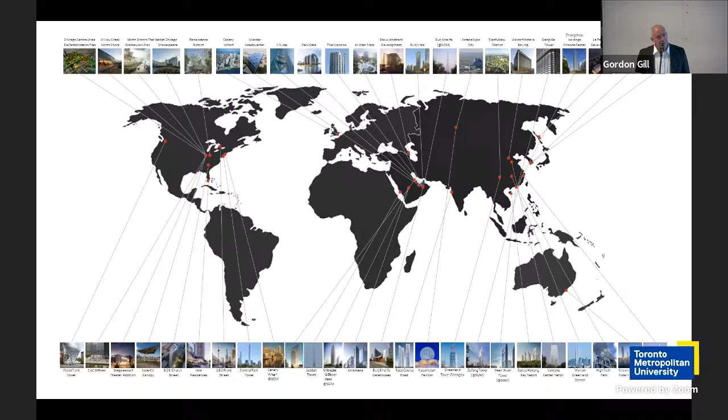We are lucky to work around the world. We do master planning. We have delivered 4 cities over the last 17 years, 2 of which are Expo cities, and we can chat about that at some point. The other 2 are expansions of cities in China, Xi'an and Tianfu.

We're probably best known for these guys. We probably have 6 of the 20 world's tallest under our belt in the firm. Adrian designed Burj Khalifa, which you probably know, when he was at Skidmore. We were just in Dubai, Cairo, and Riyadh the last couple of weeks. Kingdom, or Jeddah Tower as it's now called, is hopefully back on track, so we'll see what happens with that. Central Park Tower, the image on the far right, finished about a year or 18 months ago, is now the world's tallest residential building in Manhattan, with Extell.

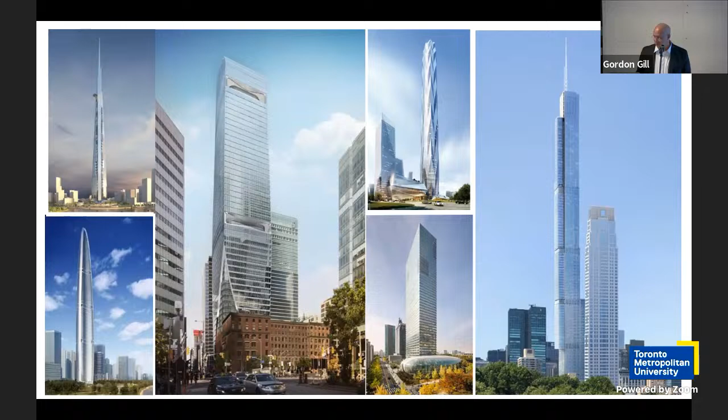And we have a host of buildings. I snuck 160 Front Street in there, as you can tell — not super tall necessarily, but certainly near and dear to our hearts. What people don't know about us is that we do a whole scale of projects, from parks to pavilions to theaters, and we enjoy that process.

In the office, we rotate staff off of projects. Once they live through a project, they go to another, but it's usually very different. What we don't do is have a team that does super tall, or a team that does theaters, or a team that does parks — so you get to work on everything we have. And we like that, it's just richer.

We find that we can transfer technology, we find that we can transfer processes. We work with artists, scientists, psychologists. Our head of sustainability is an ecologist, Dr. Chris Drew. And because of that, we do a lot of research.

A lot of these people in this room who are now at school here at TMU will hopefully see some of this, either throw it out or pick it up and run with it and figure it out and really go do something else with it. So we don't go around telling people that this is an answer. We simply say, this is our process. We'll start here.

So when we started the firm, there were 5 of us. We had some cardboard boxes. We were in a little back room in Chicago, and we were all excited when the printer came, because that big box gave us the conference room table.

That was 2006, October. In 2007, we had enough work for 1,000 architects because we had won a ton of projects and we didn't know what to do. We actually employed other firms to help us do the work. One project was 10 million square feet. So we were lucky.

In 2008, everything stopped. The economy crashed. All the projects went on hold. Dead silence. Fortunately, we were well protected financially, and so we had a bunch of people in the office and we didn't know what to do. We didn't like the idea of ballooning up so fast.

So we took that as a little bit of a moment to correct ourselves. And we went from internally 250 people to about 100 people, and we've stayed there ever since. We've never gone back to that size. And so we have a process in the office and how we work to maintain our size, because we like that connection to the people and the work. We like to get dirty, as we say, and we don't want to grow any bigger.

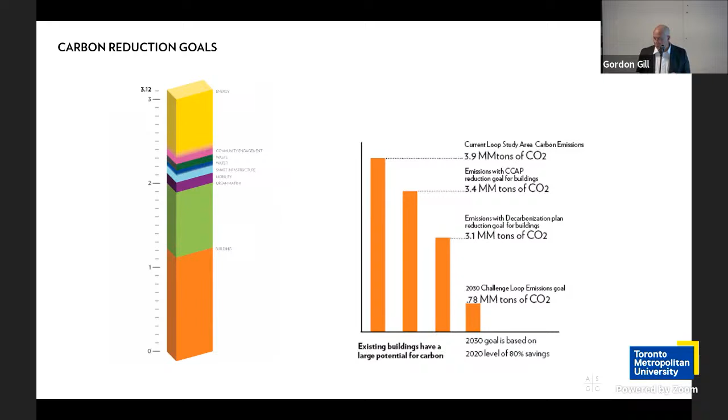And we have a 280-page document book that we published at the time. The first thing we did was try to get a hold of a physical dimension of space that we could look at, which for us was the loop in Chicago, which represented about 10% of the density of Chicago. So we took 3.9 million metric tons instead of 39 million metric tons and tried to figure out how we could remove that from the city.

We quickly took the systems-based approach, and everything you see tonight is based on this idea of systems. So what we do is we unpack an idea around a city or a building or a typology, and then repack it to try and get mutually supporting or mutually conducive efficiencies. So what does the transit and mobility have to do with water? What does water have to do with the buildings? What does all of this have to do with community engagement? And just one thing to remember, as you all know, it's all about people.

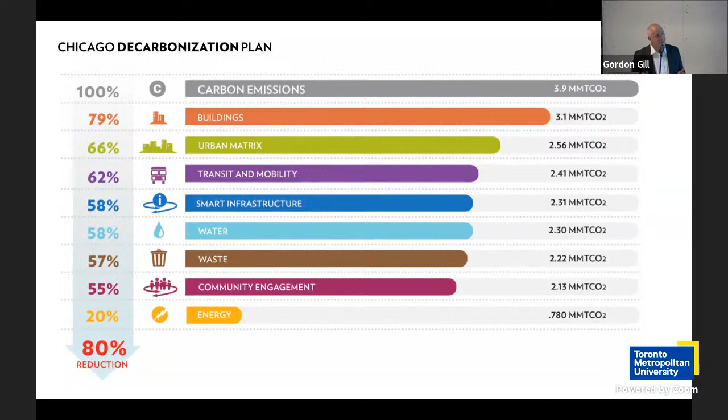We can talk all we want about architecture. At the end of the day, it's all about people. So even though technologically we can do the math and spend $27 billion on solar photovoltaic fields or wind fields and take the city off the grid, it does absolutely nothing for the improvement of the city itself or those who inhabit it.

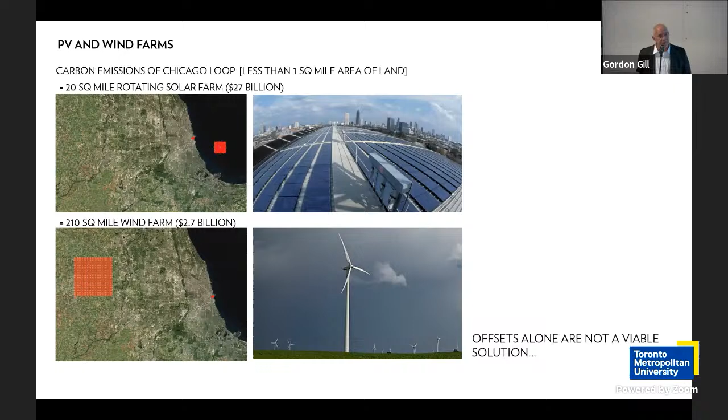We defined the core as this red loop here, which is our river, for those of you who know Chicago, and Grant Park. And at the time, our core was only 10% residential. What we learned very quickly as we ran scenarios was that residential uses about 25% of the energy of office. So obviously, the more mixed use environment you have, the better.

But it just keeps going, right? So it's not just the energy component of it. The life of the city improves. The mailman is more efficient. The delivery logistics becomes more efficient. The infrastructure becomes more efficient. And so we began to think about how we could introduce residential into the core of Chicago.

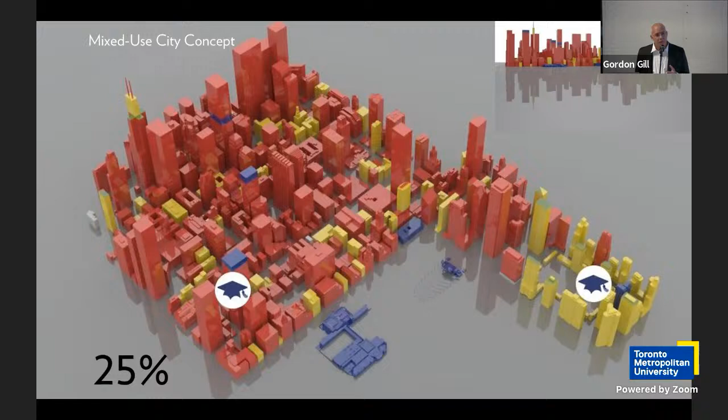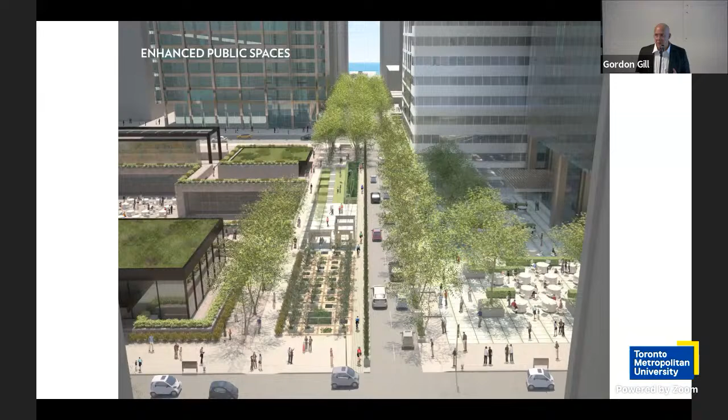And some of this was actually done. We retrofitted 24 buildings at the time, and the city went on to do some of these retrofits and adaptive reuse projects over time. We have streets that had tunnels under them for coal delivery, so we utilized those for moving air and goods.

This project, which was Sears Tower, now Willis Tower, came to us through a client who wanted us to build a new hotel next door for a net zero energy hotel on the same site. We gracefully declined and said, we don't think we can do that because it just doesn't pencil out. However, what are you doing with the big guy? What are you doing with Willis?

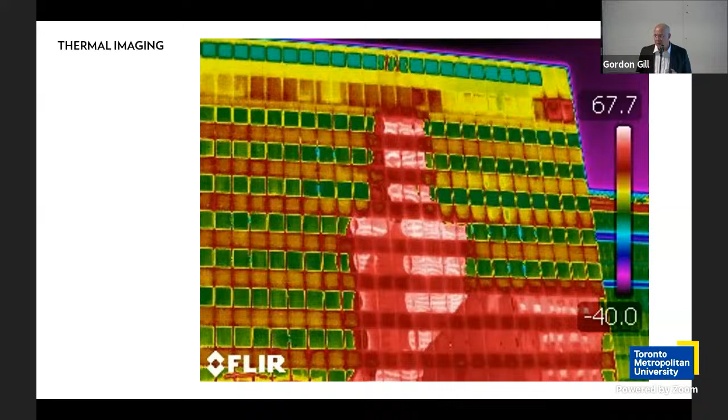To their credit, they'd been doing a lot with Willis. They'd been doing lighting, looking at the facades, but Sears Tower, Willis, was from 1974, 4 million square feet, single glazed glass, heated by light at the time. When we did the analysis and we unpacked Willis, we found that we could repack that building and save massive amounts of energy and improve the quality of the environment inside the building.

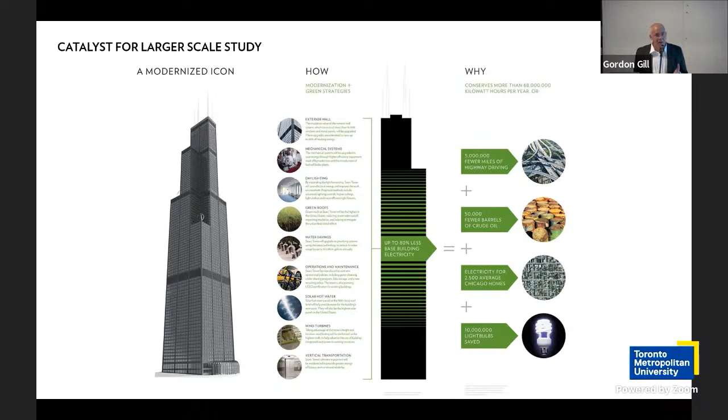That energy from that one building was the equivalent of 4 hotels on that site. So we knew that the math was working from an energy standpoint. We could have easily built 4 hotels. The equation around the economy of it was simple.

When ComEd calls me up and says, hey, I understand you guys are adding a hotel next door, we need to upgrade the substation, we said, time out. Can we talk to you for a second about that? We explained that we could retrofit the big building, bring the new building online without changing the substation. In fact, we might have enough energy saved for you to distribute elsewhere throughout the city. So the question became, how do you feel about adding more customer base to your network without any cost to you whatsoever to your infrastructure?

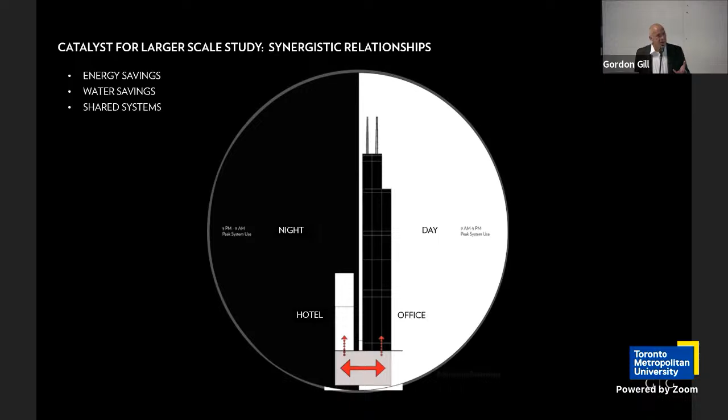They like that because they spend hundreds of millions of dollars a year on infrastructure trying to upgrade density. But the question then became for us, how do you increase density and create this equation and not influence or impact the cost and the quality of life in the city?

So we built this thing. This is a little parametric model that is now 14 years old. It was done for us to understand the interrelationships between these systems. It's complex, too complex for us to understand. We're not mathematicians, but we realized very quickly that this kind of organic or parametric relationship between systems was critical. And the only way we could understand that is to build models that helped us do that.

And today we work with people that are a lot smarter than we are, who have models like this, and help us run scenarios for the projects that we do, whether it's a building or a city or a nation.

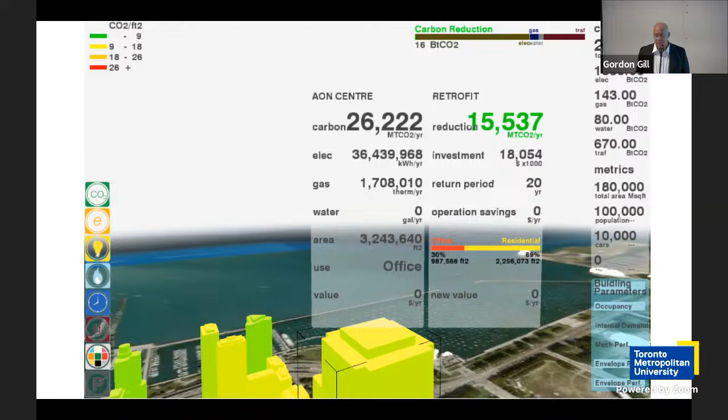We landed here that we believe, obviously, that the existing building stock is absolutely critical to our future, that retrofits are absolutely a must. Retrofit first, build second, if you can. At the same time, we could reposition the existing building stock and create value around that building stock. So it's not necessarily true that the new one is better than the old one. It's just not true. So that gave us an answer that we could actually increase development and reduce carbon at the same time. So all of a sudden, we're going around saying, hey, wait, density isn't really bad.

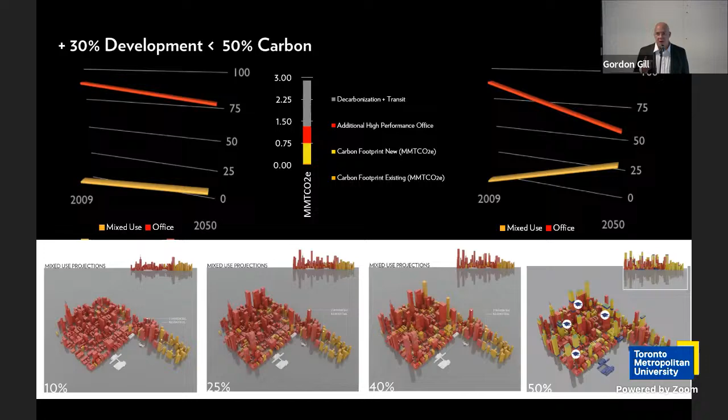Bad density is bad. But if you know what you're doing, you could actually densify and build and still be sustainable, which gave me a little bit of hope that what we were doing just wasn't damaging everything we touched. So the question became, how do we actually pursue this as a practice? Today, the average building efficiency in our practice is 66%. I think the AIA average is 45%. Our goal is to keep pushing that if we can get to 80%.

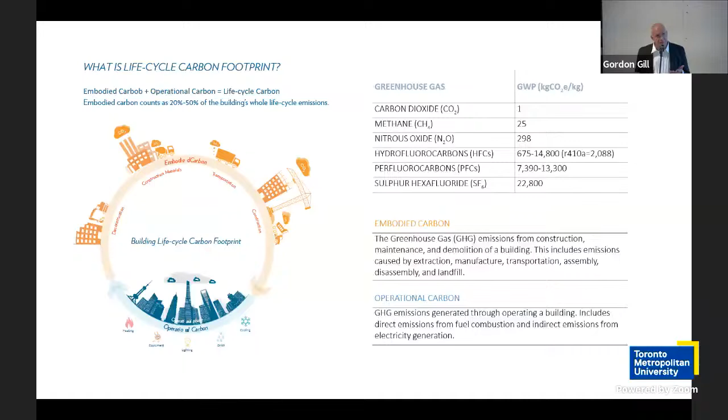Now the question around embodied carbon came up. We've done a lot of work on this, including the density study we did for 5 years, looking at 9 different typologies. The answers might be obvious in terms of where the balance sits. From a megatall to a single family home - 2,000 single family homes on land versus one point tower with 2,000 units - less land, but you have massive amounts of concrete and infrastructure in the megatall. So the answer is somewhere in the middle, around 60 stories or so, in a balanced equation.

However, that's just the building. When you look at the equation around land use, you realize you can densify a structure and put a point tower on a piece of land and save that land for something else, like food. If we go back to using a photovoltaic farm or wind farm covering hundreds of acres, which we still do, but if we didn't do that and instead put it on the buildings and saved the land, that equation around food changes the entire carbon footprint. It's just a completely different story.

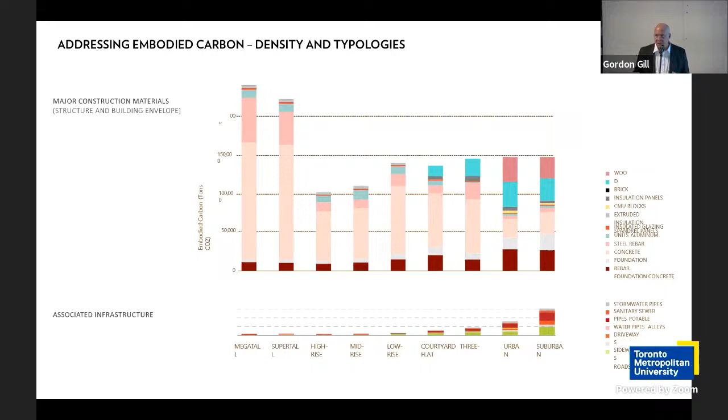We measured the mailman, the backyard fences, the snow plows, the cutting of the grass - everything we could - over 5 years. We worked with engineers to give us data on concrete, wood, and steel, tested these 9 typologies, and published this book. We use this information constantly as we test and dive into things like materials.

Everybody talks about concrete and everybody talks about wood. Everybody loves wood - some of my best friends are wood. Don't get me wrong, but it's not a panacea. Why? Because you're not going to build your infrastructure out of wood. You're not going to build your roads out of wood. You're rarely going to build bridge infrastructure out of wood. You're not going to build your core out of wood.

Even though wood is, as a material, good, it's dangerous to suggest that it's the answer. As I mentioned before, we don't believe in panaceas. We believe in a balanced equation. If we can take something like concrete, the most prevalent material on the planet, and do better with it, we've got a much better chance of solving problems than suggesting that in Dubai, you're going to build your towers out of wood, because they're not.

The problem is that we think about what we can do. Unfortunately, we're the ones exporting our knowledge to everywhere else, but they can't do that. It's just like offsets - we don't promote offsets because not everybody can buy a jungle in Brazil to offset their building. We also think it produces bad behavior, because if you can offset your problem, you're not really solving it. You're just kicking the can down the road.

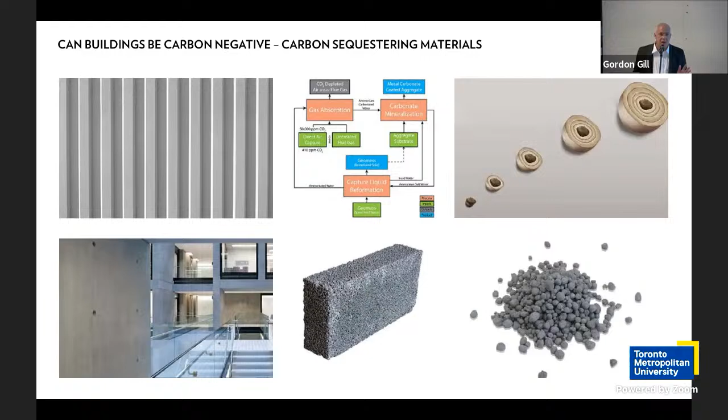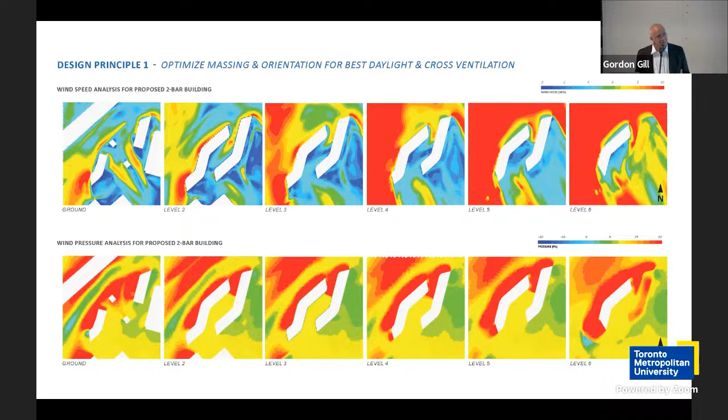We did this study for a tech company in California who thought their path to success was wood. It turned out we can create an equation around design for everything from daylighting to comfort to efficient buildings, and really look at how we can create scenarios that run models to tell you how to lower your carbon footprint. This was a 350,000 square foot office building in California.

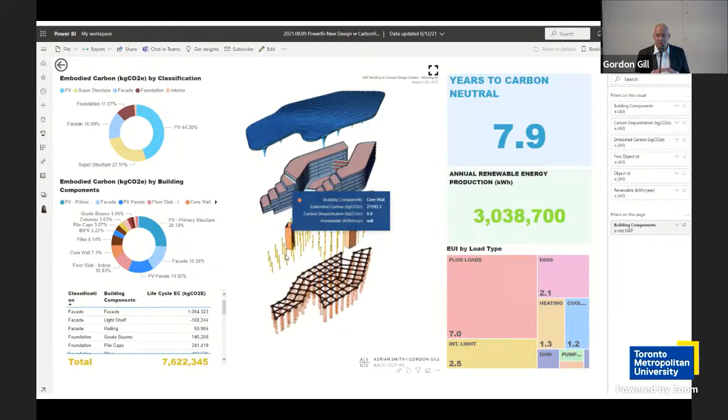We found that we could run the equation to get to a net zero carbon, embodied carbon equation in about 7.9 years. What does that mean? It means we're creating enough renewable energy on site.

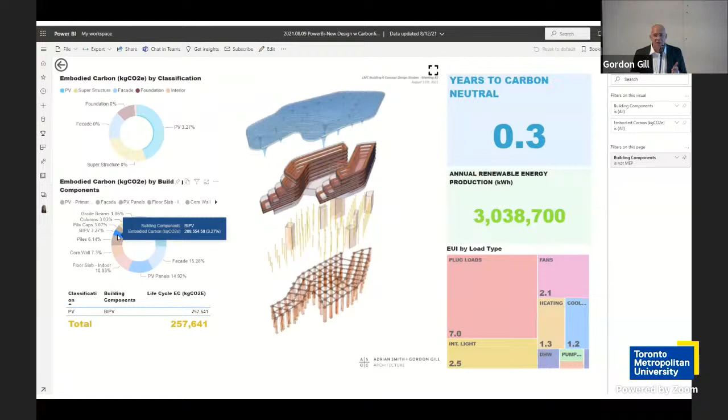That means we have started with a passive design solution to use less energy. Although we talk about technology, we are not technology hounds. We actually are not. We like passive design first, and then bring the technology if you need it. If we can get your building to 50% efficiency, 60% efficiency without any technology whatsoever, just good rock solid design, you win. You want to get the rest of the way? Now we can talk about a technological solution.

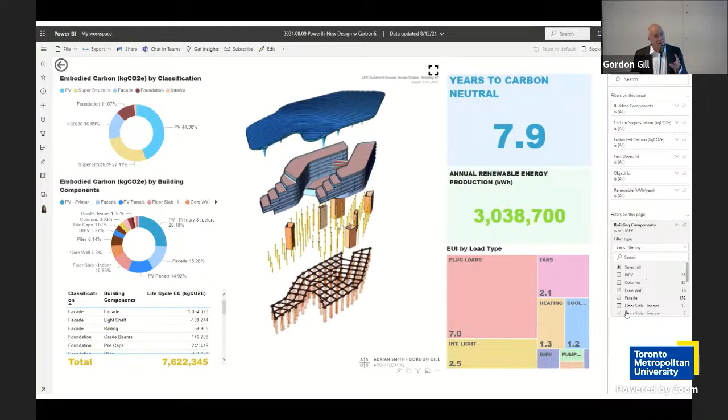At the same time, we're not going to just simply apply that technology to the building we designed for you. We have that conversation with you up front. If you decide that's where you want to go, then we integrate that solution, because applied technology is also, we think, not the way to go.

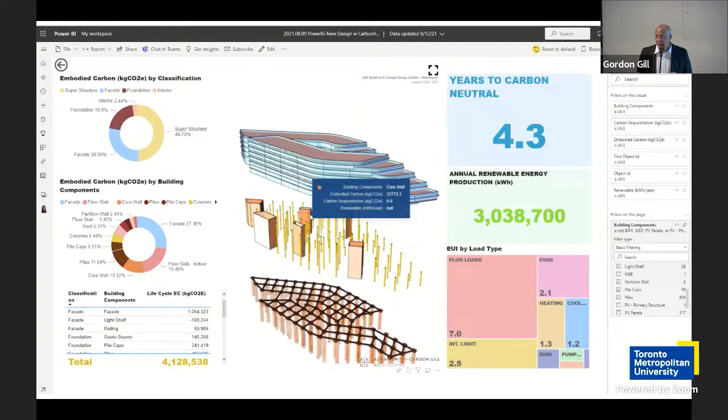When we go to places like Dubai and are asked to look at the Expo in Dubai 2020, we apply the same systems. For Expo 2020, we did the legacy master plan, the sustainable master plan, the architectural guidelines, and we were fortunate enough to win the centerpiece of that project in a competition, called the Al Wasl Plaza. It's a park and a trellis, and I'll tell you about that, with 5 little buildings around it.

So once again, we unpack it and we repack it. But here's the thing: the Expo is thinking about the 6 months or so of the Expo. We reverse engineered it, designed a community, and then reverse engineered it into the Expo for 6 months. So we introduced the idea of where you would live, how you'd walk to work, where the schools might be, and what the density might be because of the pro forma around the future city, not the Expo. The Expo will do what it needs to do, but afterward, what does this place become?

And I was there last week. Now they're in Expo City mode, or Dubai City mode, which is the expansion of the uses and the introduction of residential, education, and business towards it.

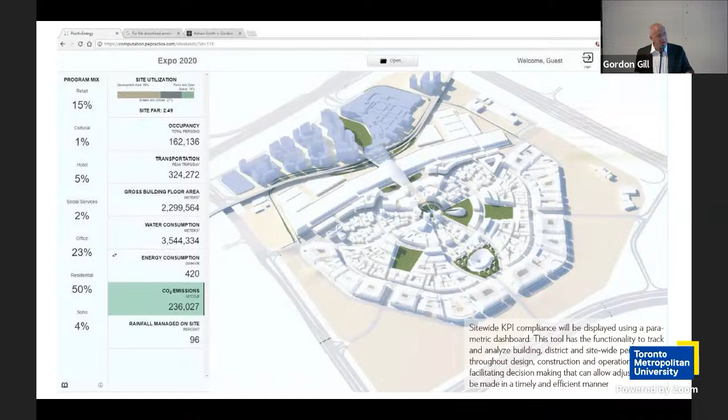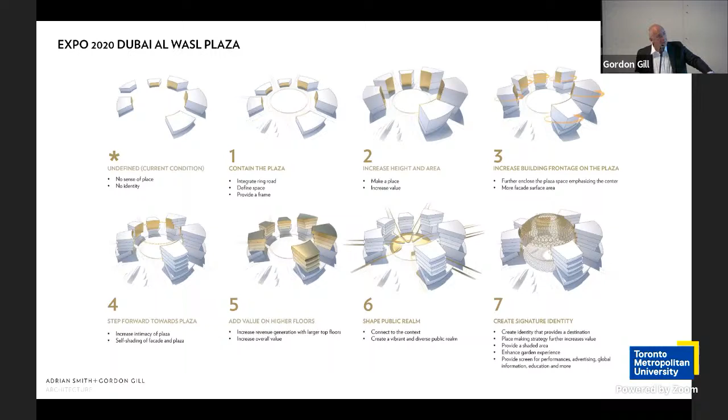First thing we did was we increased the density. And we did that by taking the 2-story buildings around the center space and turning them into 11 stories. We have a flight cone, so we were limited, but 11-story buildings, 3 office, 2 hotel.

The idea behind this is a revenue generation equation about the economy of the project itself. So the first thing we ask the client is, what is your pro forma? And if the client says, don't worry about it, trust us, we know what we're doing, we run like hell. Because the only way that our buildings are going to succeed is if they are economically viable.

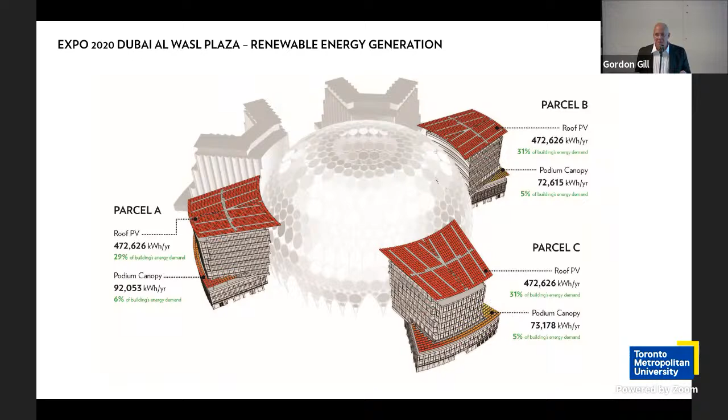So when we talk about sustainability, we're talking about cultural sustainability, social sustainability, environmental sustainability, and economic sustainability. No one is going to do something incredible from a sustainable standpoint unless it makes economic sense. You can say they're going to do it, but they won't. And if they do it, they'll do it once—it's not a process by which they're going to repeat. We have some clients that talk to us about this, and those equations vary.

First sketches on this idea for Al Wasl was to put a park at the center of this district. So the story goes, Her Excellency Reem Al Hashimy, who was our client and has become a friend, was and is in charge of Expo. She asked me what I would put in the center of this space, and I said, a park. And she said, what? A park? Why are you telling me a park when everybody else is telling me to put a tower on this site?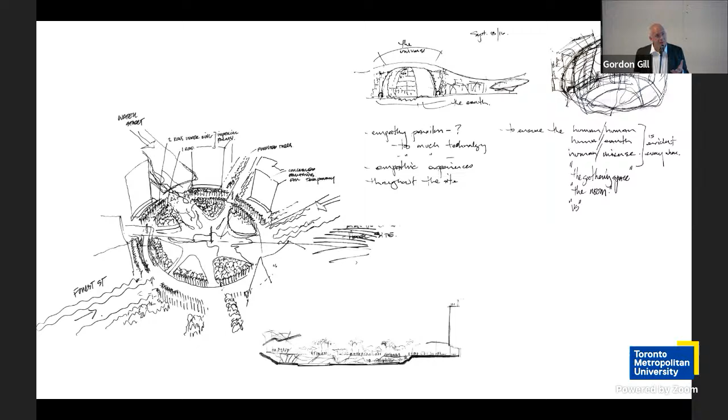I said, because I think if you want to leave a legacy for your district and something for people, you would give them a park and you wouldn't privatize the most important space in this district. In addition to that, show me a dedicated formal park in Dubai that's usable throughout the day, because most of the parks are leftover spaces, or if they're designed, they're only occupied at night because of the temperature—it's very hot, obviously. So we came up with this idea: a 130-meter diameter, 67-meter tall trellis that shades the park. She said, 'Gordon, you know that Sheikh Mohammed wants to put a tower here.'

I'm like, yeah. She goes, you want me to go and tell Sheikh Mohammed that he's wrong? I said, it sucks to be you. And she smiled at me. And I knew that when she smiled at me, we had this relationship. She understood.

That lady is probably one of the smartest, bravest people I know. Never done a development before, 5 years doing an expo, built this city against all odds, 24 million visitors, delivered it. And now she's in charge of the next transition.

This trellis is a fiberglass fabric that transmits light. We built the park with SWA at the base of it. We scooped it out so there's a bowl, kind of a vineyard concept for the space. The center is a stage that ascends up from below, so all the performers come from below and ascend up in the middle of this park.

At night, it transmits light. There are 252 projectors in this space. It just was, I think, a couple of months ago, entered and received by the Guinness Book of World Records as the world's largest outdoor immersive space. Those projectors came from Waterloo. The 252 projectors are in pods. Each one is about $300-something thousand. They're water cooled. They talk to each other and communicate back to Waterloo constantly, because if one goes down, the other one covers for it.

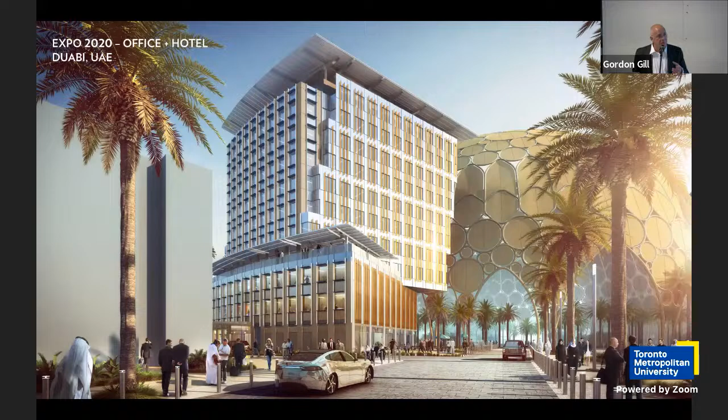Those little buildings are designed through a whole system of carbon and energy use for daylighting, water, and efficiency. They have all been sold and are now occupied. That carbon effort walked through 3 years of design and then all of the construction. We had 5 people on site working with the contractors so that when they changed something or wanted a substitution, we could run the carbon analysis on it to make sure the goal was still being met—because what happens is you run a calculation on a target, walk away, and then it changes. We don't want that.

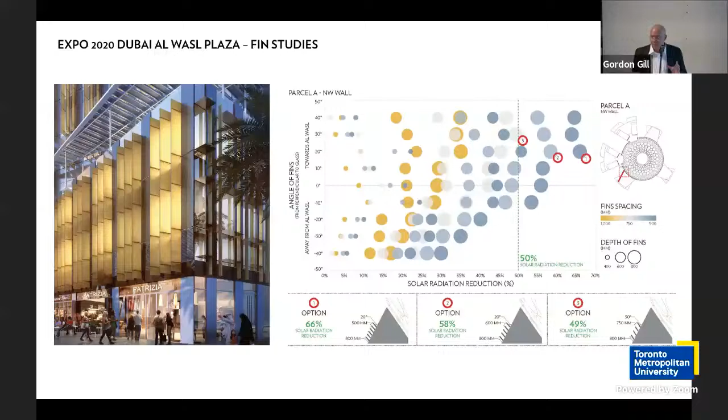I grew up in Jamaica. I was there a couple weeks ago with my wife, a month ago with my wife, and we were talking to one of the ladies we know there who lives up in the hills.

She has to walk and go get water. She has no water in her house, doesn't have a well. She has to pay something like $2,000 a month, Jamaican, to get a truck to bring water to her house. That might not sound like a lot of money to you or us, but for her, it's huge.

Why is that? How are we doing this? When I ran the equation around Dubai at the time, they were spending $5 billion on desalination plants. I asked the group, what are you doing that's so sustainable with desalination plants? They said, oh, we have photovoltaics on all the desalination plants. Who cares? Of course you can put photovoltaics on a desalination plant. Who cares? The problem is, why do you have a desalination plant? That's the real question.

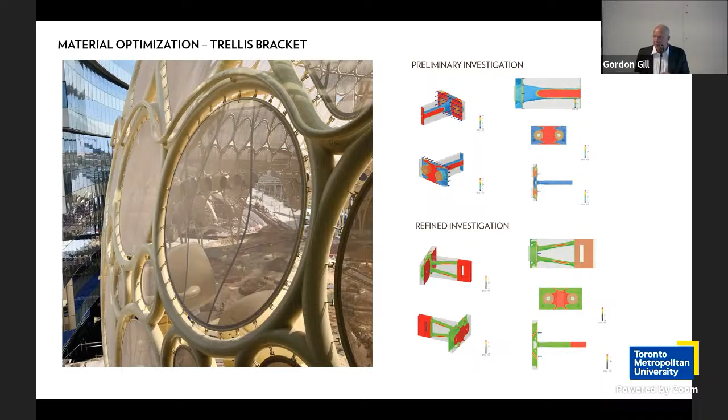The embedded carbon, we worked with a group from Venice on the steel. When we do carbon analysis, it's life cycle carbon, so we're looking at all the material sourcing, all the construction, all of the operational characteristics, and hopefully we end up with a place that people love.

24 million people walked through this building because it was an exhibition. Today it's the center of the district, and now they're densifying that district around it.

I sat in this pool. This is the only reason I show you this image. I sat in this pool the night they lifted the crown of Al Wasl Plaza. It took 36 hours and 17 jacks to lift that steel into place. I was up there by myself. It was obviously under construction, so it looked nothing like this, but it was a beautiful moment for me because it was one of the largest steel lifts ever, and it took 36 hours.

So you're up there by yourself just watching this thing like paint drying. But the technology behind that was fantastic.

We also do things like this. This is Jeddah Tower.

When the client comes to us and asks us to design the next world's tallest, again, we ask about the proforma. What a lot of people don't necessarily understand about these buildings is that while Burj Khalifa, for example, can net 200 million US dollars a year off the observation deck, just 4 stories, and pay for itself in 5 years, not all buildings can do that.

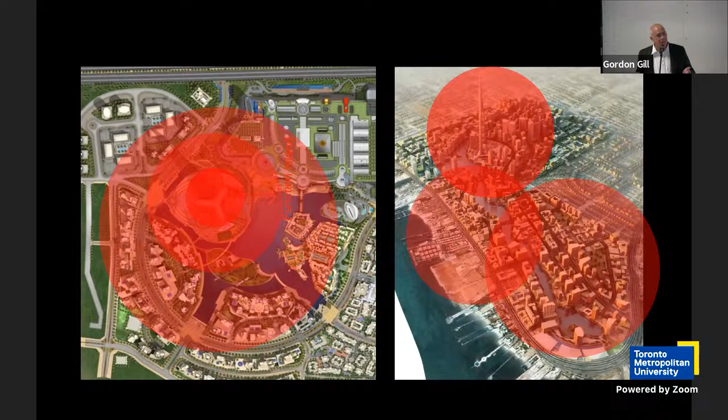The equation around the super talls is often about the land around it and the development around it. Especially in the Middle East and China, these projects are often part of a much larger city plan, and when the land value increases around them, that's where the developer gets the economics around the city.

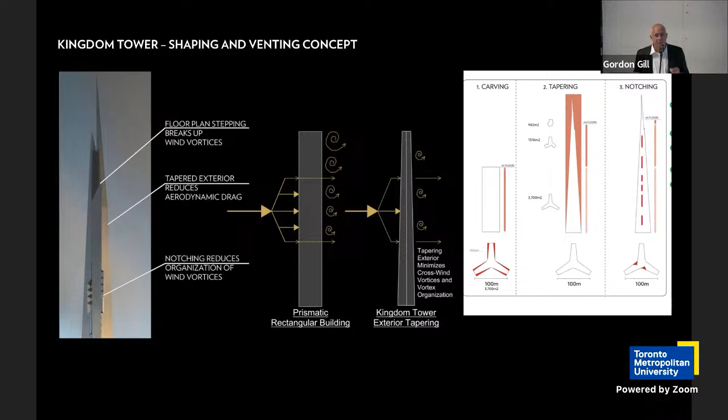In this particular case, the world's tallest is now designed to be over 1 kilometer, about 20% taller than Burj Khalifa, primarily residential with some office and hotel. But as you know, the wind design criteria on super talls is the governing criteria: movement, acceleration, torque. So we spend a lot of time tuning the form.

So when we talk about the formal language, or the language of performance in Al Wasl, that form around acoustics, comfort, microclimates in the bowl, the landscape, shade, protection from dust storms, that's where that comes from.

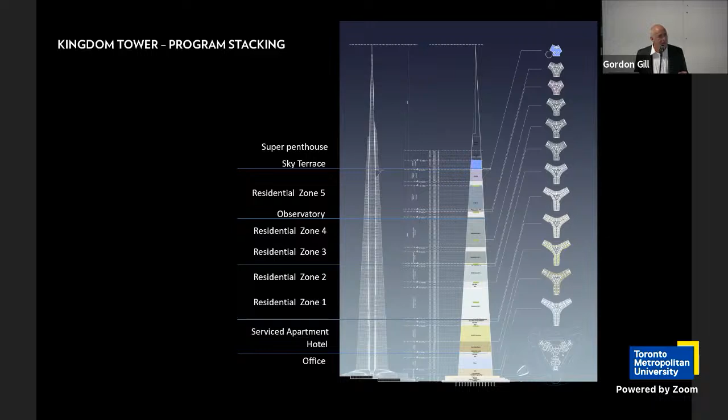Here, it's about tuning this building for behavior characteristics: acceleration, torque, and wind movement. Comfort and the psychology behind comfort is critical in these buildings. You don't want to be in your apartment and see the bathtub water sloshing around on the 130th floor. Not a nice feeling. So wind tunnel tests and studies are always critical for us, regardless of what we're doing.

And sometimes when we do these things, we get asked to do things like this. We're in a meeting with the sheikh, and he says, I'd like to put a helicopter pad up here. And we're all shaking our heads. We're all going, no.

And he looks over at his guys, and his eyes go, yeah, no, absolutely, no problem. And we're like, no, please don't do that. So now we have this request and directive that his guys need to follow, which we know is not a good idea. How do you navigate a bad idea with a client?

What we did is we put the majlis there. The majlis is where they greet their guests, meet and hold conversations. We put the majlis at that floor and explained that this would be the world's tallest majlis, and that you can walk out on that floor and see your kingdom from that platform. No more helicopter pad.

Now, how do you do that? Wind mitigation. If you look at these things, you'll understand that they're stratified, so the wind is cooler higher up you go. We farm the wind with the building from outside to offset the cooling needs from the building. We farm it from the top, circulate it through, move it out through the base. The temperature is dropping, I think, about 1 degree every 100 meters, or 10 degrees every 1,000 meters, something like that.

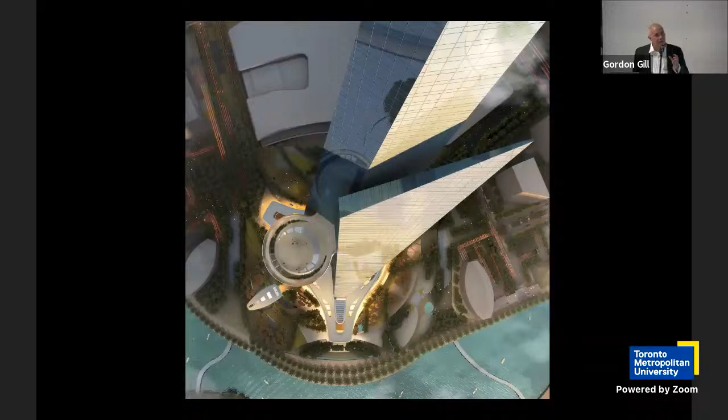In this particular building, because it's a concave body, we talk about reflectivity and heat intensity. We calculated that we were actually generating a tremendous amount of heat off the angle of incidence of the sun down onto the ground plane where people are walking in. And you might remember a building in London that cooked a Jaguar. You remember that? A guy going to the bank, parked his Jaguar outside, went to the bank, came back out, toast. They didn't understand the impact of their architecture on their surroundings.

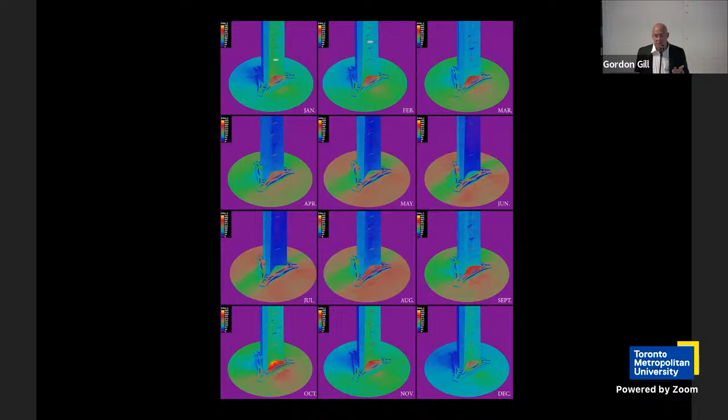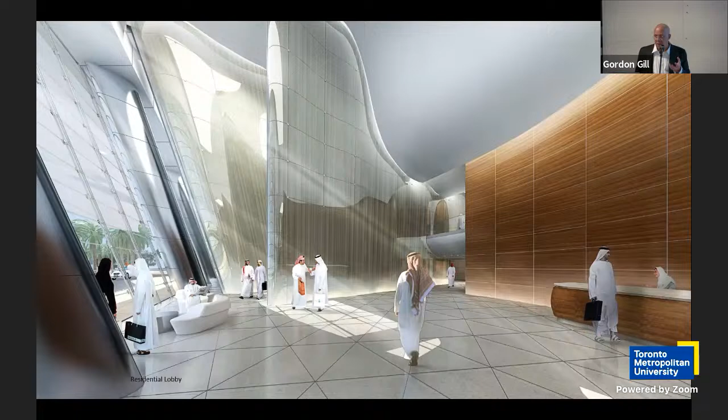Here, we checked it. We understood that we were generating a tremendous amount of heat at the base, so we increased the lobby and put a photovoltaic farm on the roof of the lobby. Now the heat that we're generating is actually creating power for the building itself. We're looking at ecosystems or loops, balanced equations around the ecosystem of the building you're designing, and hopefully you create a decent lobby while you're doing it.

Hopefully this building will be completed. It's now back on track, we hope, to get completed. We'll see. But a lot of people say to us, oh, so sorry that building didn't get built, that's a shame, you must be very upset about that. Like Masdar headquarters, for example, was never built. Sorry you lost that, sorry you must have. We're not sorry, because the work that goes into the science behind that project, we use it again and again and again.

Nothing is wasted. A lot of people I've heard in practice say things like, I never learned anything about that in school. Oh crap, I learned everything in school that I use every day. Everything. There's all kinds of stuff. We were just talking about it here, and talking about some of the courses we took here.

I'll tell you one thing about this school that helped me when I went to Texas. When I went to Texas, I understood how to draw a building section because of this school.

I understood what materials meant and how they worked and how to put something together. I had a first project. I drew a section of the building in one drawing.

A professor saw it and asked who did that, and said, how would you like to be a teaching assistant? I said, sure, I'd love to be a teaching assistant. That doesn't sound like a big deal, but when your student fees go from international student rates to in-state student rates—at the time it was $10,000, which may not seem like a big deal, but for me it was—it went from $10,000 to $760. Yahoo.

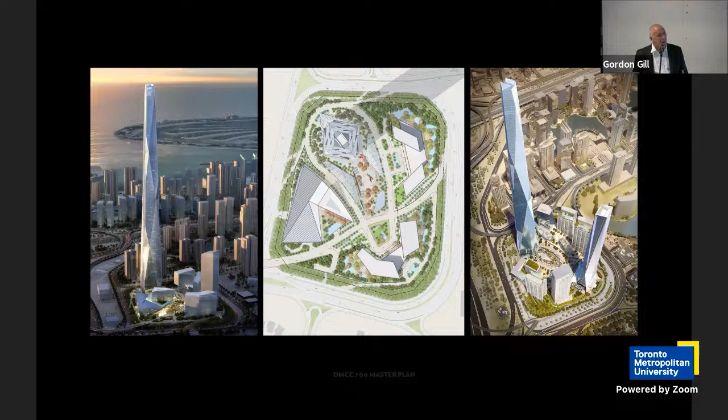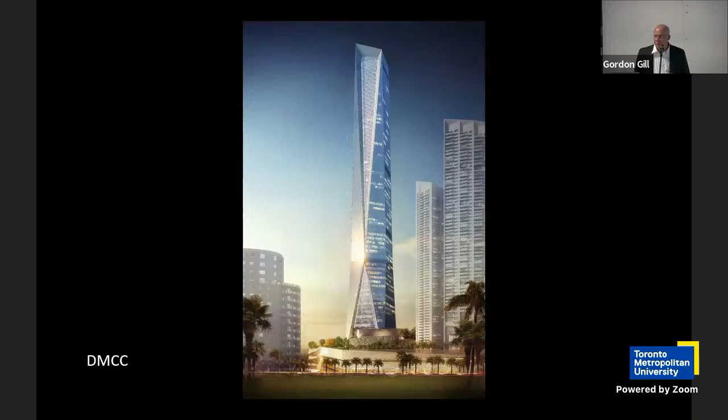This project we talked about last week. This was a master plan that we did in Dubai many years ago for DMCC. This project just got completed, and this is a 340-meter tower called Uptown Tower, mixed use, office, hotel, and residential. And this just got finished about a few months ago, and is doing very, very well in Dubai. I just show you that because not a lot of people have seen this building.

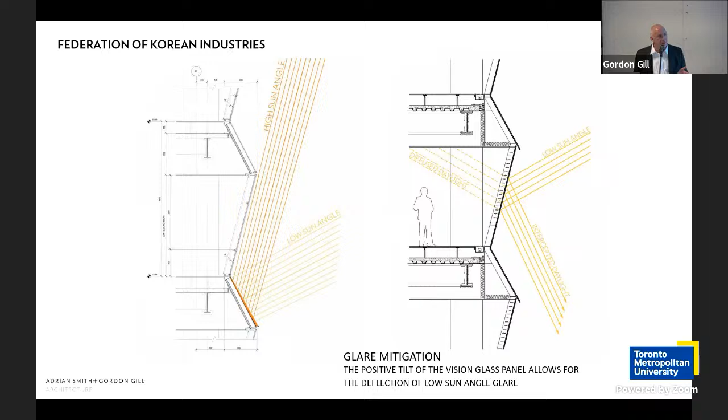The notion of integrating photovoltaics in the facade, we did an FKI about 14 years ago, Federation of Korean Industries in Seoul, Korea. You might recognize this building, the facade of this building. I brought it to show you because we're going to talk about 160 Front Street a little bit. This was the first edition, the 15-degree shift in the vision plane to reduce the angle of incidence on the facade to reduce heat load. And at the same time, what we found was that we were getting incredible kind of views out of this building. So no longer are you perpendicular to your facade on the inside.

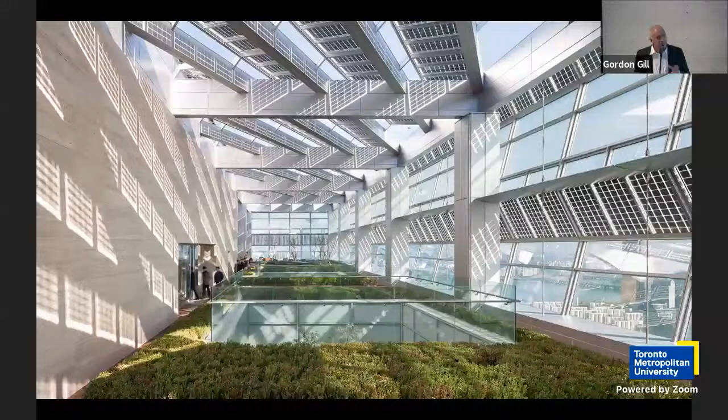You are now able to lean forward and occupy space outside of the slab, beyond the slab. We like architectural moves that have spatial consequence. We want you to have an experience that's, again, a little different, but hopefully safe. This building generates tremendous amount of energy for itself, and at the time had an incentive for 7 times payback the amount of energy that you got on this project. The top roof is a garden and a farm and has been very successful over the last 14 years.

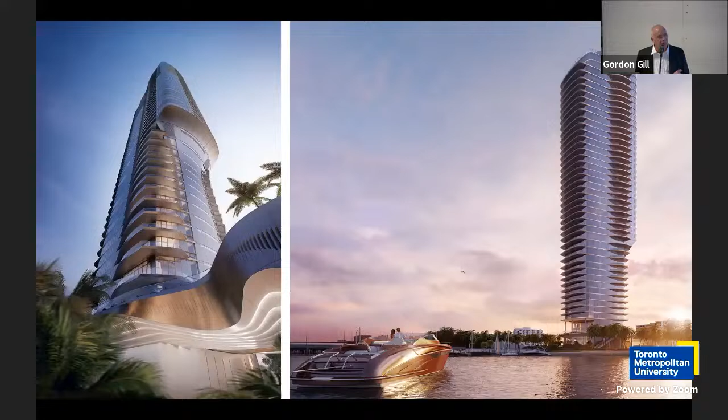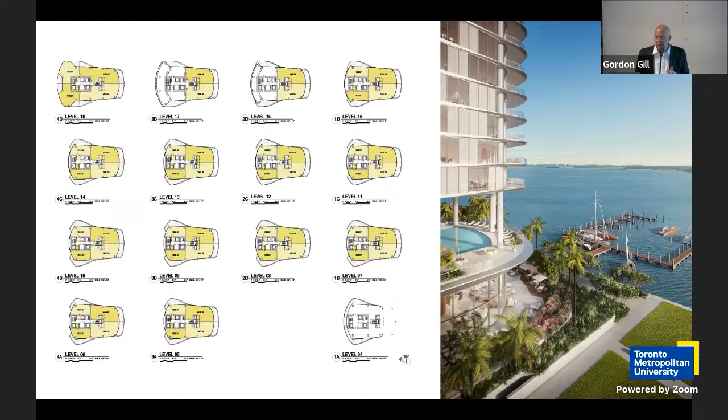We do residential projects like this one in Miami, same kind of process around experience. This plan is really tapered with the sharpest point towards the water. So no matter if you're in the rear units, you're still getting water views. And this one is currently under construction in Miami. This client has come back to us. We did the architecture and interiors for this job. And this client has come back to us for 2 more projects.

Let's talk about these last few here, and then I'll call it a day.

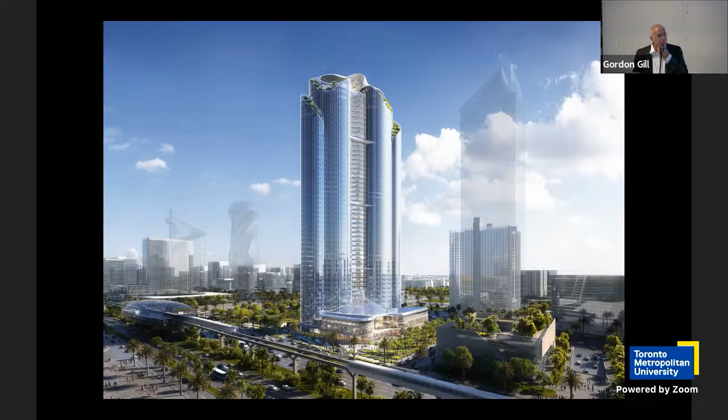This project has not been published yet. It's been announced, but not published. It's for a client called Magnom Properties in Cairo. It's in the new capital. And this client asked us if we could calculate a life cycle net zero carbon on an office building, which is about 47 stories. It's about 1 million square feet.

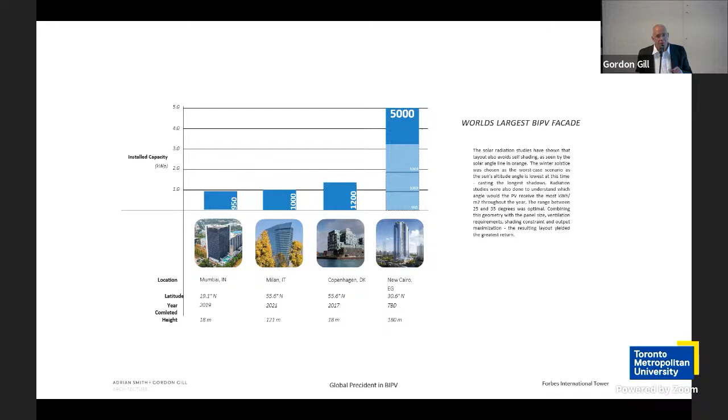Again, we ran the equation around the possibilities of that. But the problem with this particular building is that we don't have the surface area for the renewable energy. So we put the photovoltaics in the facade. I'll show you that in a second. Right now, the blue graph that you're looking at, the first 3 bars are the output of facades that are currently out there on the planet. The biggest outputs, we're the far right. So we're producing 4 or so times what the next person is producing.

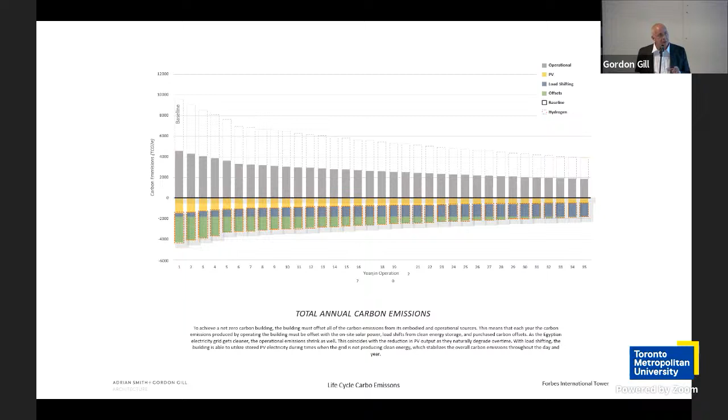We ran the carbon equation, again, life cycle embodied carbon, no offsets. So we introduced liquid hydrogen into this building. There is an LOHC, a liquid hydrogen system that is a truck delivery for hydrogen that then generates energy in the basement of the building. First time it would be implemented into a building. And that is fed by the photovoltaics. So again, we create a loop system around it. The photovoltaics are BIPV embedded in the glass, laminated. So it's not a shelf. FKI was a shelf. It's not a shelf because the shelf collects dust. And in this environment, the dust would kill you.

So when we run the life cycle equation around carbon and think about the maintenance of the building, we don't have to build the extra aluminum, we don't have to build the support for the photovoltaics. We keep it flat and simple.

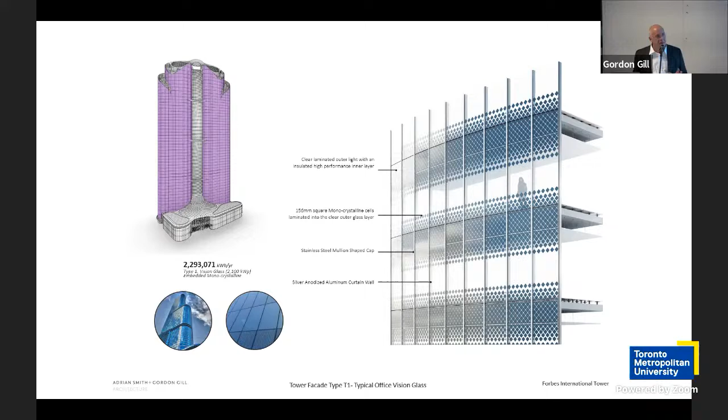This is a single loaded building because the client wanted certain views, which is fine, we just have to deal with it. So what we did is we laced the core with photovoltaics. The core is on the west side, harsh west sun. And then we introduced embedded photovoltaics as a kind of mashrabiyah type pattern in the office space, so we're diffusing the light, creating shade, and generating power.

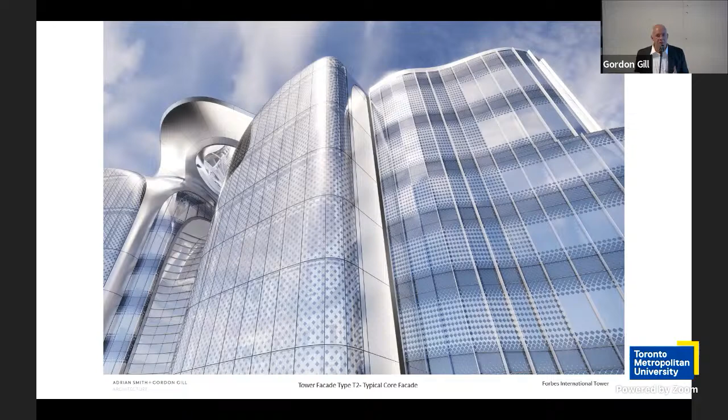What we're looking for is 4 or 5 things that one system can do. When we do that, we get an architectural expression that is definitely a little different. You may like it, you may not. The question is, does it have value?

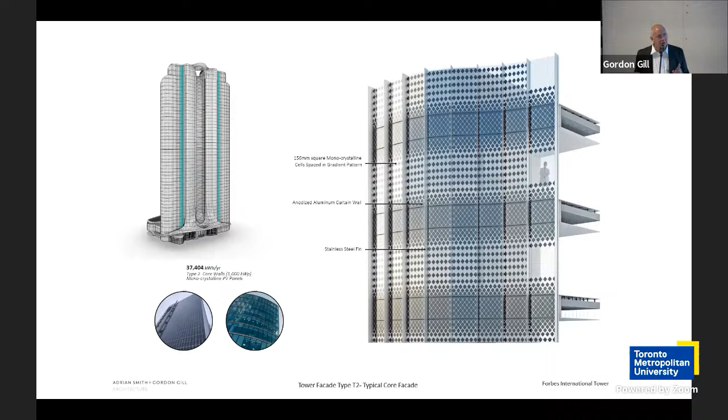Forbes International saw this project and asked to put their name on this building. Forbes International has never put their name on a building before. This is now the Forbes International Tower. We took this project to Davos last year and presented it at the World Economic Forum. It was very well received, and now Forbes is asking where else we can do this.

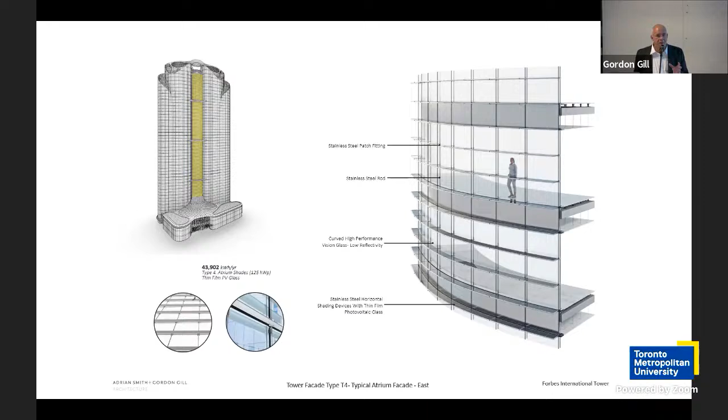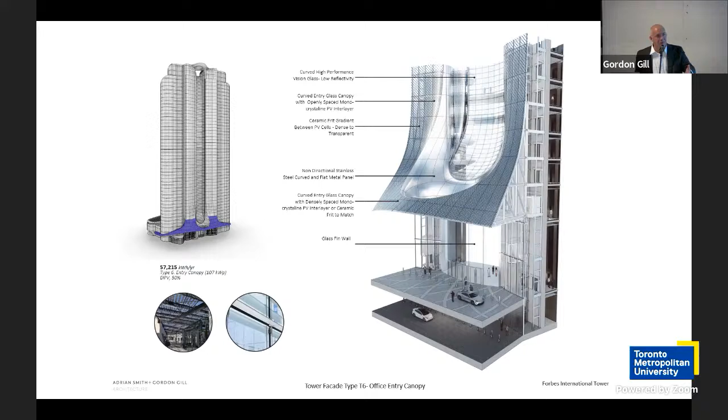The economics around it are very aggressive, so we have to work very carefully with the client, Magnum, and explain to lenders what the equation is around the economics so that they can understand their equation around the financing of the building, because they're different. The upfront costs are more, but the payback is there.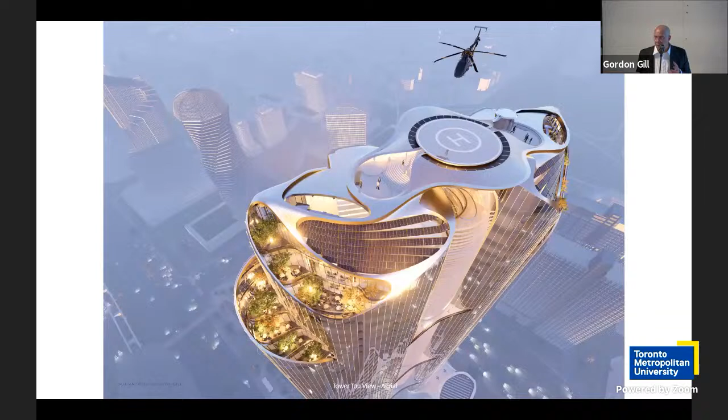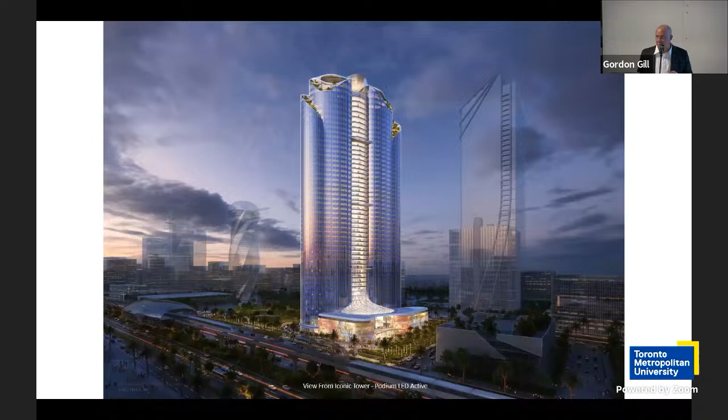We do a lot of fun things in the office. We are constantly integrating spaces for people to use in our towers, or environments where they can have different types of experiences, and we try to do that here.

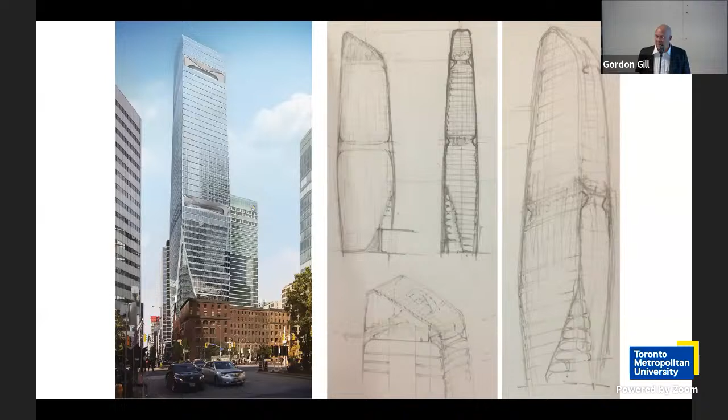This is 160 Front Street, almost moved in, finished, topped out, right here at Front and Simcoe for Cadillac Fairview. It's a 13-year project, 13 years ago we started that project, so you've got to have patience to do these things. The evolution of that project was very interesting to us.

Cadillac flew to Seoul, Korea to see FKI, the folded plate facade with the photovoltaics, and they understood it and liked it. So we had introduced this idea and they said, well, where can we see it? We said we did one similar in Seoul, so they went to see it.

This building is doing a number of things. People often ask, why does it look like that, why is it shaped like that, why is the form like that? We were told that this site is kind of on the edge of the downtown core, for better or for worse. If you go a little more west you feel like you're leaving the core, so it's kind of an edge condition. So we put the high point of the tower on the west corner.

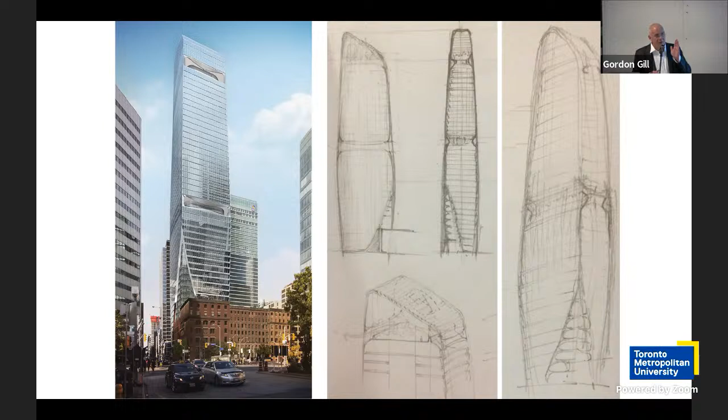We took the tower and pulled it out of the podium for the same reasons I explained to you at Central Park Tower, and put the building on the corner. We shaped the building so that it's facing, or gesturing toward, Union Station and the intersection at Yonge.

So it's directional, that is its profile. It's narrow at the base, then gets wide, and then gets narrow again. The reason is that urbanistically, we wanted to increase the sidewalk space on Simcoe, so it doesn't just come straight down. It's shaped like this and then tapers in, so you get a wider sidewalk.

However, the city of Toronto has very strict guidelines on wind comfort levels at the pedestrian level. The reason the building is shaped and textured like that is twofold: one is to shed that downward force of the wind so it doesn't come straight down on Simcoe, mitigated instead by shedding it outward, which it does. The second was to create texture on the facade to once again help confuse the wind and create a little more efficiency in the structure.

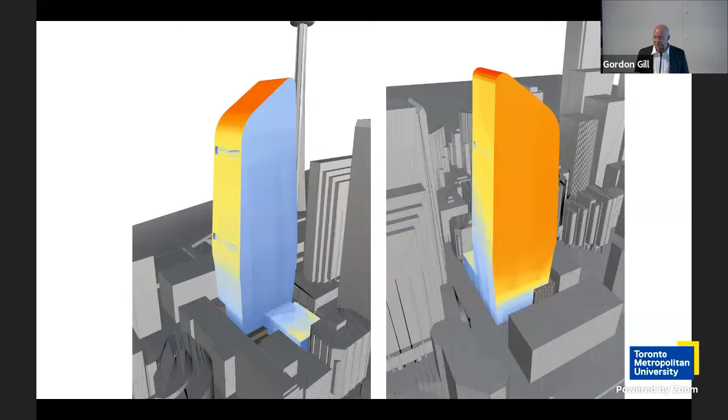A part of this project that I thought was just fascinating was the lighting. I don't know if you've heard about it or seen it, but I thought this was very interesting. We're asked to run the analysis, do all the heat gain calculations on the facade, do all the good stuff we're supposed to do on this building. And it works pretty well.

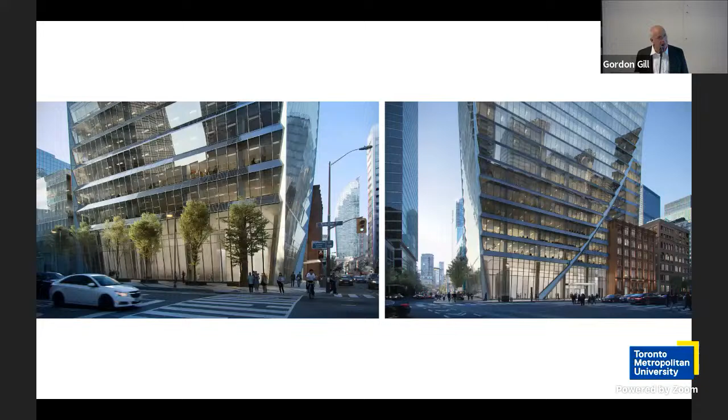We have a couple of balcony terraces at the mid and at the third points, to kind of allow or provide outdoor terraces for the tenants. We want you to step outside again, if you're comfortable doing that—clearly very safe. The notion of tapering the building was also part of the heritage relationship, to kind of reveal that heritage piece and celebrate it on the corner.

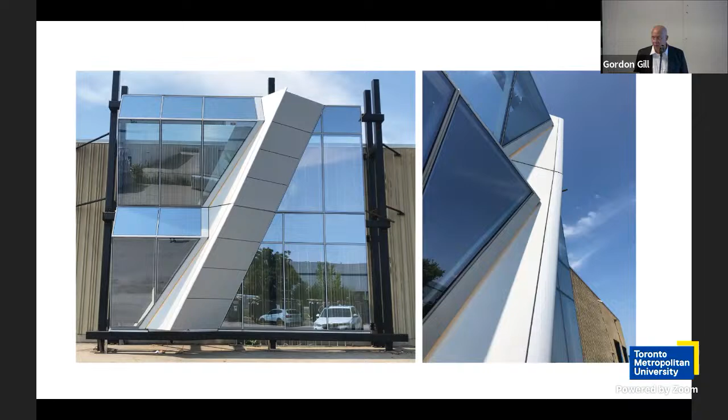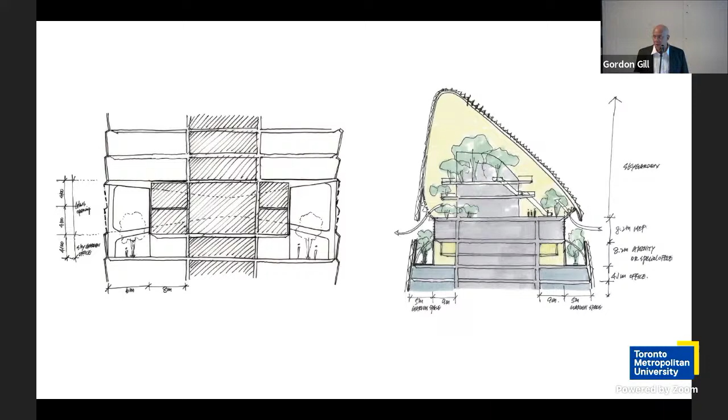Here you see the facade and the structure we used for the fin, and then integrated the lighting into that sawtooth corner. In the daytime, the fin holds the sunlight and it's white—you can see it if you drive by it. At the top, we introduced a number of different systems to create a high volume space of about 30-plus feet, which is a wonderful space. And then we created this transitional lighting scheme on the facade.

The tenant, TD, wanted a signature statement. We wanted it to be a little more artful, not just a sign, so we integrated this lighting system. Of course, the lighting went through a whole series of tests and caused a lot of consternation in the public, because people thought it was going to be this moving, gyrating rainbow of colors. That's not the case. Now it's settled down, I think, to about 50% of its intensity, to create hopefully a much more elegant solution.

The question became, and I heard this dialogue from Chicago too, what is happening to our city? What is happening to Toronto? Does this mean we're going to become like Hong Kong Harbor, and now all the buildings are going to get lit up? I am fascinated by this conversation. Maybe, I don't know, but it seems to me that these types of moments in time are very important to the dialogue around what the city will become, and what really you guys want Toronto to be.

I was fascinated by the fact that lighting that building like that could create such consternation. I'm not apologizing for it, I'm just fascinated by it. I think cities change and they grow and cultures shift. And sometimes, because of the jobs we're asked to do, the tenants and clients are asking us to just push that thing just a little bit.

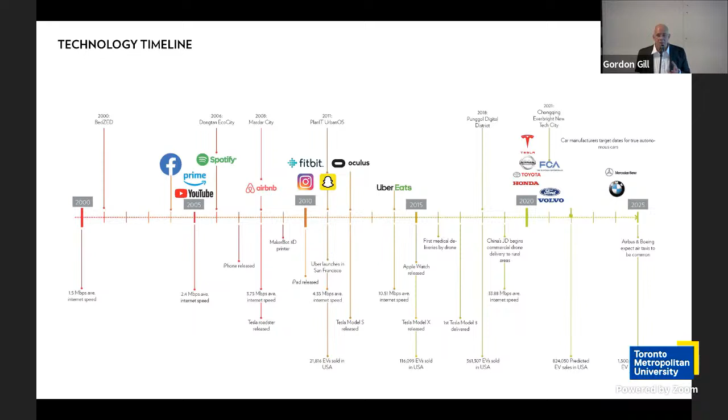Two thirds of the group's like, what? That's impossible. What? Well, iPhones? Yeah, Blackberries. Look at the changes that have happened in the last 15, 17 years. Circular economies around zero waste, embodied carbon.

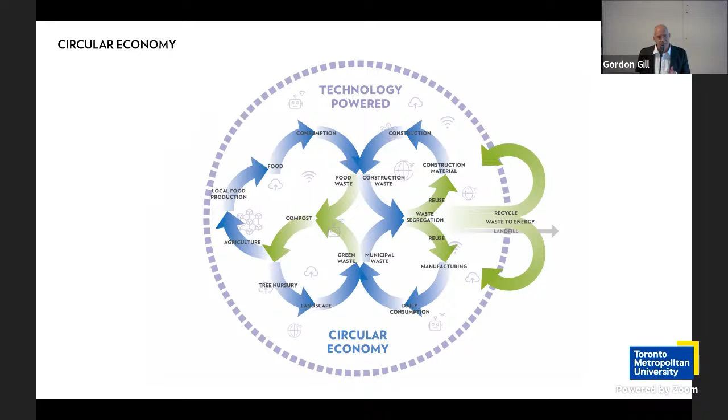Two years ago, we were asked to contribute to the infrastructure plan in the United States. We were one of five groups. We were the building side. So we unpacked the United States. We wrote a 380-page book about it and submitted it as part of the infrastructure bill. So they took some, threw some out.

But nonetheless, what we were learning was about looking at things like the highway system, Amazon's system, first tier, second tier, third tier cities, townships, villages, healthcare, affordable housing. How do you affect these things? By understanding how the entire system of a country works.

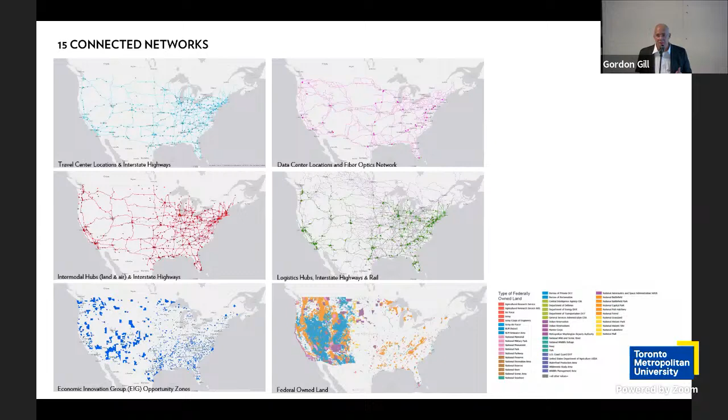There are some countries we work in that are about the size of this city, like Jamaica. There are other countries, obviously, that are massive. But the notion that your work on a daily basis through your architecture can influence a nation or change the way that we think about infrastructure, which is a huge effort, is now, I think, something that we want to pursue. I'm just going to leave you with this.

We're teasing you in that exhibit with the model that TMU built about Toronto. Toronto, we understand, we think we understand, is going through a huge growth spurt and will for decades to come. At least the data we're seeing is not slowing down really. What are you going to do with all these nice people? You have created a beautiful city, a fantastic environment to live in. I think one of the most beautiful cities anywhere.

You are outpacing cities like New York. You have a very stable environmental kind of city, great public spaces, beautiful waterfront. And all of a sudden, you're going to have to densify it and densify it and densify it. You could do what London did, drew a ring around their city and infilled it, or you could connect to all your neighboring suburbs and sprawl it.

But our two cents is that you should take a very close look at the carbon plan for your city and think about it in terms of 100 years or more. Run the scenarios in two directions, upstream and downstream, and get the data to help you understand how it is exactly that you want to grow.

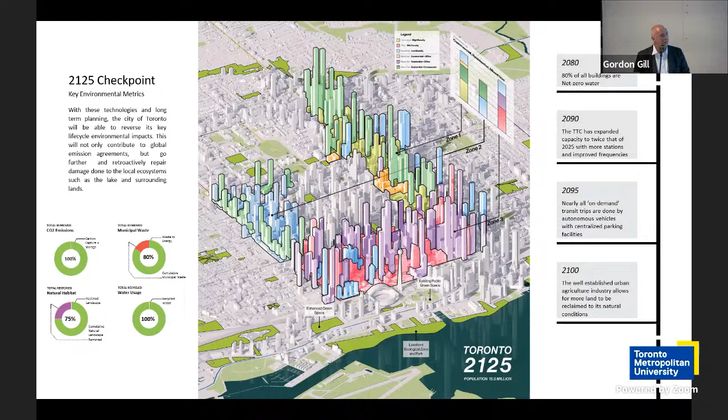Well, I just wanted to say, at one point you said early on that in the end it's all about people, in the final analysis it's all about people. And it just suddenly occurred to me, I promised Lisa I wasn't going to say anything, but obviously you're in Chicago, which is the home of Louis Sullivan, the tall office building artistically considered, the invention of the skyscraper. He was into ornament. That was going to be my question, but now I realize his last book, he died poor and homeless, Louis Sullivan did, he died poor and homeless, and his last book is called Democracy.

I was just doing some reading on ESG. I didn't really know what it is, just yet another acronym. But the middle of it is the social component of environmentalism, and I think you've tried to give good emphasis to it. But we have a problem of gentrification and divided wealth. What are some of the best initiatives you've seen, looking at the big picture, to ensure that what's being delivered is going to benefit everybody?

So there have been a variety of projects, some of which we've been involved with, some of which we have not, that really talk about putting either development or technology in the hands of local groups or people that under other circumstances have no access to it. A lot of times it's around water and things that are just needed for life.